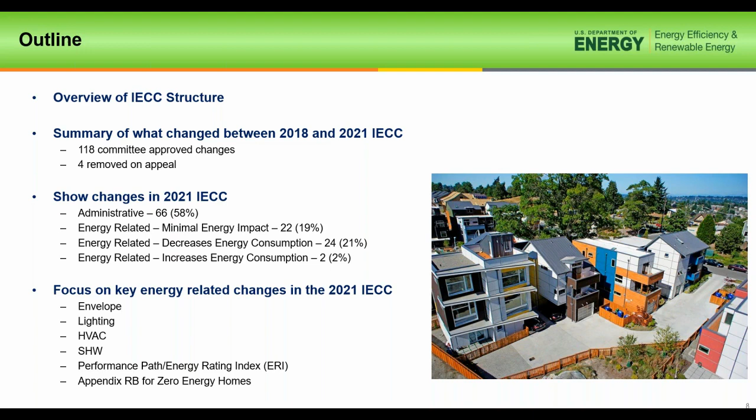So let's start with the structure of the IECC. So the first question is, why do we care about the IECC? What's important in this realm? What it does is it guarantees a minimum level of efficiency in new buildings and renovated buildings. So it ensures that we can see energy reductions, energy efficiency improvements, as well as emission reductions over the life of the building. Energy codes are a subset of the building codes, which describe the requirements for building construction.

And there's an additional cost benefit with codes: it's much more cost beneficial when we build in energy efficiency at the beginning of the cycle in the construction, as opposed to bringing in high efficiency in an existing building. It's much more costly. So if we can guarantee that the efficiency is designed and built into a new building, then it's much more effective in the building lifetime.

So we look at commercial and residential sections of the IECC, and we have similar chapters. We have a chapter for the scope and application, administration and enforcement, and definitions. We have general requirements, and then we have the efficiency chapters, and this is where a majority of our discussion will land today, which defines how to comply with the energy code and the different pathways that you could choose to show efficiency compliance.

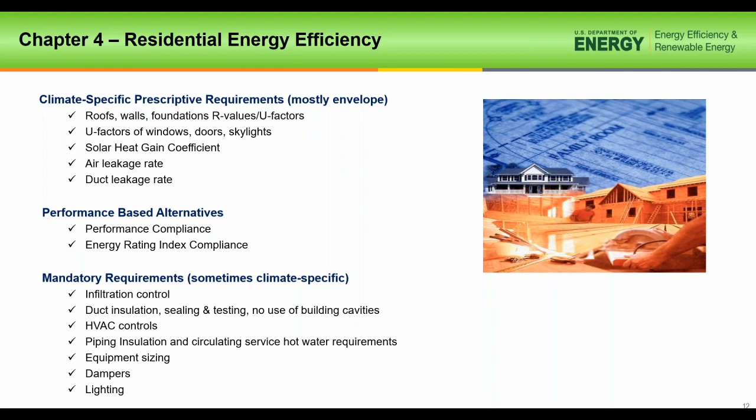And so some terminology I'll be throwing around throughout the webinar is first is prescriptive. And these are component-specific requirements that can or cannot be lessened or eliminated in trade for compensating improvements elsewhere. So I'll talk about in the next slide where there are prescriptive requirements that are absolutely mandatory to be met, and there are some that could be traded off in other places within the envelope.

The performance and ERI, the Energy Rating Index compliance paths, these take the annual performance of the home and compare it to a standard reference home. Now this standard reference home is primarily set based on the prescriptive requirements and some operational requirements in the code itself. So we're comparing a home on an annual performance between the design and the standard reference. And then again, like I said earlier, the mandatory requirements, these cannot be traded down in a compliance path. So these are absolute mandatories that must be met.

And one thing I'd like to note when we talk about performance path is, as I mentioned, the performance path is taking the design home and comparing it to the standard reference home, which is based on the prescriptive requirements of the code. The ERI path is comparing the design home to a standard home that is part of the RESNET Standard 301. That standard is based off the 2006 IECC. So your design home for the ERI is compared to more of a 2006 IECC level home to come up with the ERI rating.

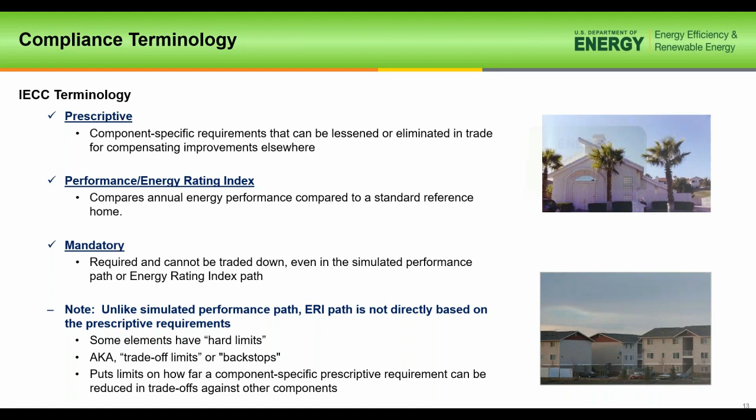So we'll talk a little bit more about the compliance pathway options. So there are actually 3 options within the prescriptive requirements that you can show compliance. One is an R value prescriptive requirement. So basically, this is saying that your R values in your envelope meet the prescriptive requirements, point blank. If they do, great. If one envelope component does not meet that R value, the building does not comply. So it's very easy to show compliance with this. You can have it in a hand checklist or a spreadsheet. You can show that the home meets the R values and the home complies.

There are U factor and UA trade-off possibilities where if you're looking at the U factors of the envelope, you could trade off assembly components within that component U factor. So in the walls, you could create any wall assembly, but as long as the U factor for that wall meets the U factor requirements, then that wall complies, but it must be all through the building. So the walls, the roof, the floors must meet the compliance U factor.

There's a UA trade-off compliance path as well. This gives a little bit more flexibility where you can trade off UA values between envelope components. So you may have a wall insulation that may not meet the prescriptive requirements, but you have a roof insulation that's well above the prescriptive requirements. So the UA for your ceiling, you can trade off some of that benefit to the walls, and as long as your design building UA is less than or equal to the UA of the standard reference home, then that building will comply.

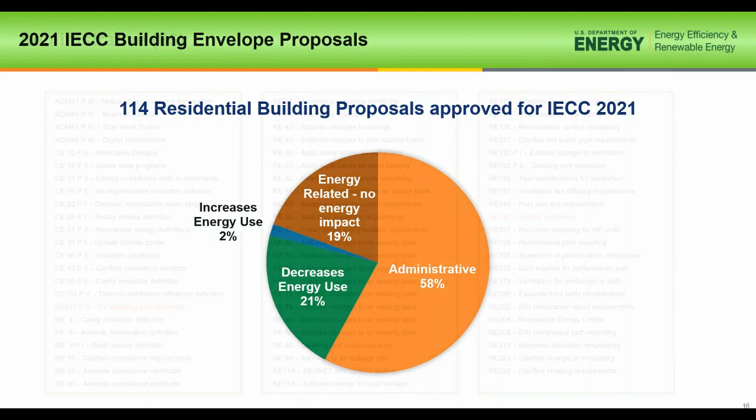So as you can see here, 66 administrative changes to the standard, a majority of them are editorial, process changes, clarifications, definitions, adjustments, and amendments. So these really don't have much of an energy impact, but are clarifications and updates to the code. You can see I've highlighted two in red over here, RE147 for electric readiness, and the one for EV charging and readiness. These two were removed on appeal by the appeals board, so those will not be part of the 2021 IECC standard.

These sets were deemed to have either minimal energy impact or possibly increased energy consumption. When you think about this minimal impact or increased energy consumption, there could be arguments that in certain cases these could possibly decrease energy consumption or maybe have more of an impact. But like I said, based on our established methodology, this is where these proposals fit into place. And we'll be discussing quite a few of these as we move forward.

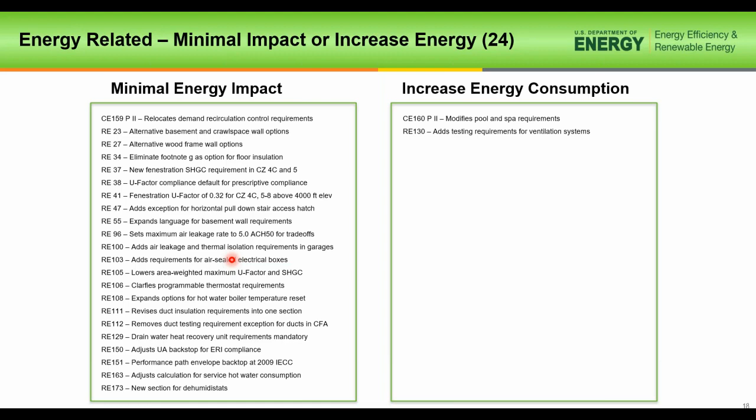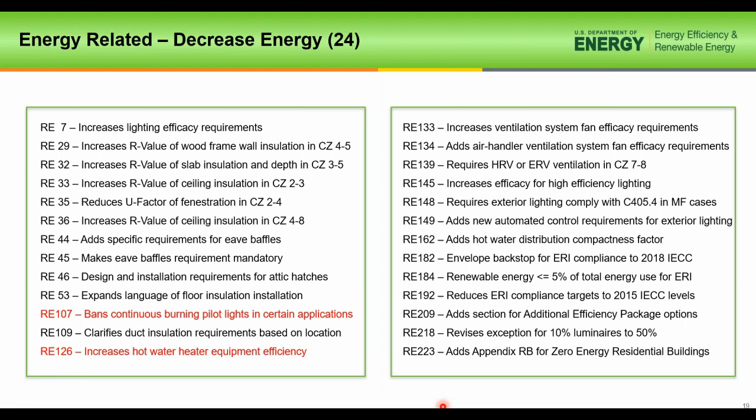And then finally, we have 24 proposals that will definitely be decreasing energy. And again, I'm showing two here. One that bans continuous burning pilot lights, and the other that increases hot water efficiency. Those were removed on appeal as well. So we ended up with 24 proposals that will be going into the 2021 IECC that will help reduce energy, basically increasing efficiency. So without further ado, let's look at the components themselves of the buildings and see what's going to be changing.

So RE29 basically says increase R-value of the wood frame insulation in climate zones 4 and 5. And so you can see here, basically adding R5 insulation to the sheathing. So as opposed to 20, there's 20 plus 5 or 13 plus 10 for climate zones 4 and 5. So this will definitely, in those climate zones, help increase energy efficiency.

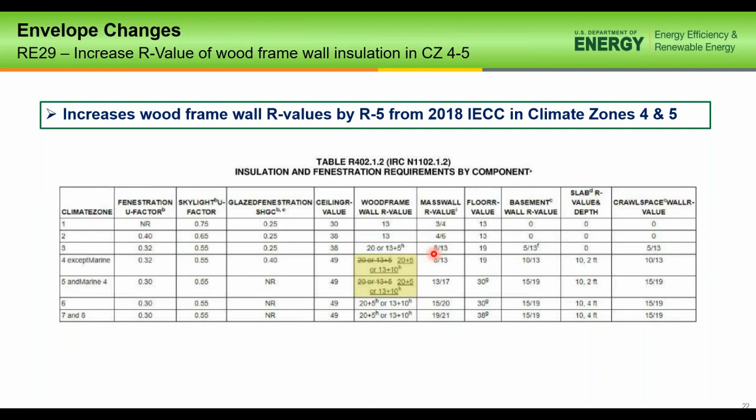And then for slabs, we got some new slab insulation requirements. One being for climate zone 3, previously there were no requirements for slab insulation in climate zone 3, and now there's R10 at 2 feet of depth for perimeter slab insulation. While in climate zones 4 and 5, they've kept the insulation the same at R10, but increased the depth from 2 feet to 4 feet, matching up what's in climate zones 6 through 8. So that will definitely help in the heating season for energy consumption. Especially in climate zone 3, it might show a little increase in cooling consumption, but overall there'll be a total energy reduction there.

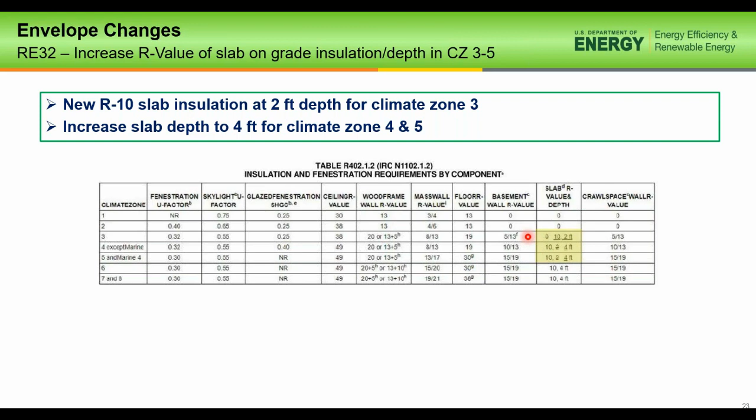So for ceilings, we've got 2 proposals affecting different climate zones. For climate zones 2 and 3, we're going from an R38 to an R49. And then in climate zones 4 through 8, we're taking it from R49 to R60. So definitely increases that will benefit energy consumption. So all climate zones except climate zone 1 will be shifting in the 2021 IECC.

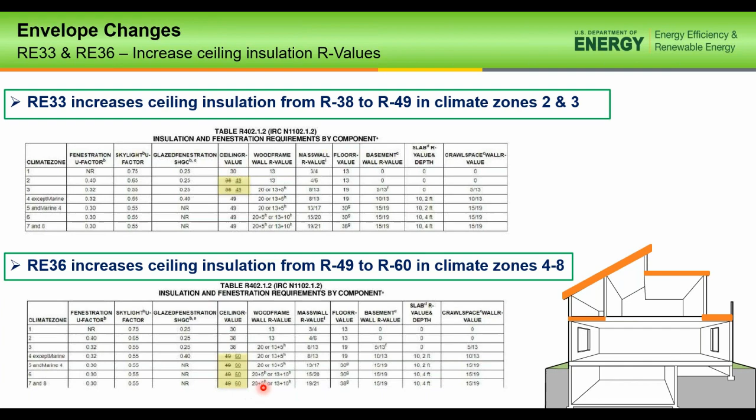So then we've got 3 proposals that affect the window requirements. As you can see, in climate zone 2, we're going from a U-factor of 0.4 to 0.35, and then in climate zones 3 and 4A and B, going from 0.32 to 0.3. So definitely improving the stringency of the window U-factors. Also, RE37 is adding a solar heat gain coefficient requirement of 0.4 for climate zone 5 and 4C.

And then there's another requirement down here which possibly has an energy impact of increasing energy consumption, where we're specifying an allowance of a U-factor of 0.32 in climate zones 4C up to 8 for homes above 4,000 feet in elevation or in windborne areas. You can have a U-factor of 0.32 rather than 0.3, because in those harsher climates, it's hard to get lower U-values, especially based on the pressure differentials or the structural protection for these windows. So those were the reasons behind this proposal of allowing a U-factor of 0.32 rather than 0.3 in these locations.

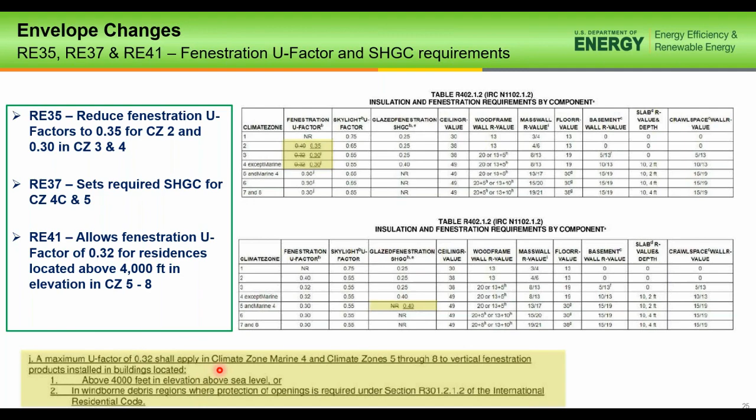And this one, this is where we're excited that we have backstops for windows in the code. This is one of the mandatory requirements, where even though you have prescriptive requirements for the windows and allowing for trade-off, you still have to meet an area-weighted maximum U-factor or solar heat gain coefficient. So in climate zones 4 and 5, it's going from 0.48 to 0.4, and from 0.4 to 0.35 in 6 through 8. And then for the windows, the solar heat gain coefficient is going from 0.5 to 0.4. So this provides a mandatory backstop for your windows.

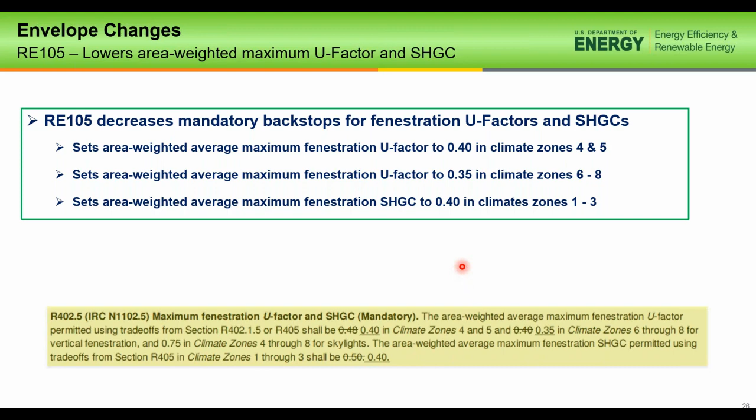And the reason behind this is, since earlier codes, this hasn't changed at all. While prescriptive U-factor and solar heat gain coefficient requirements have dropped over the years, so they've improved, this backstop has remained the same for all these years. So this change effectively better aligns the backstop to what the current prescriptive requirements are for U-factors and solar heat gain coefficients. So this one has been a long time coming.

And there were two proposals that added additional assembly possibilities for the walls and basement walls. So originally, you could use R15 continuous insulation or R19 cavity insulation, and you still can, but now we've added a possibility that you can use R13 cavity insulation combined with R5 continuous insulation. So this is in climate zones 4C through 8 for the basement walls. It doesn't really affect energy consumption, just gives different prescriptive allowances for different assemblies.

And the same with the wall requirements, where here it gave an option that you could have zero cavity insulation and provide all your insulation on the sheathing or exterior, so it's continuous insulation. So this provides just different options that you could use in the prescriptive path for showing compliance.

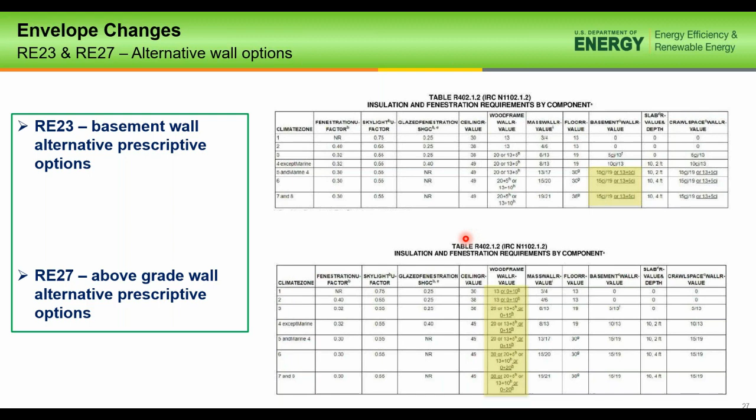Another envelope change is under the performance compliance. Now it allows infiltration to be at 5.0 ACH50, so it allows trade-offs based on your air leakage in the design home. So for the prescriptive requirements, if you're in climate zones 3 through 8, you still need to meet the 3 ACH50 infiltration requirement. But if you're going through a performance path, as long as your air leakage is less than 5 ACH50, the home will comply and meet the requirement. And it allows the design home to get trade-off credit for lower, tested infiltration.

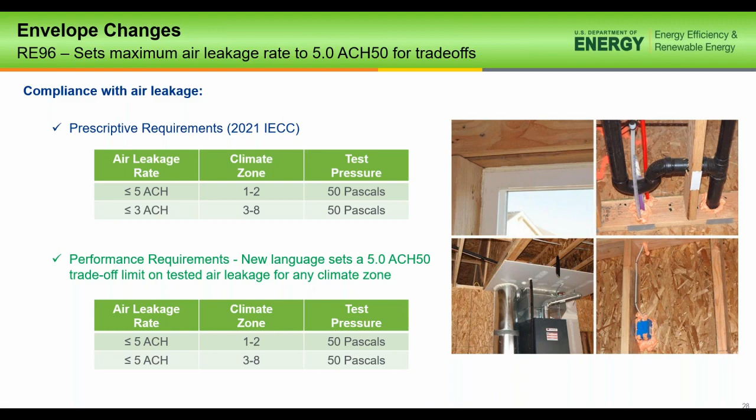So if your design home had 3 ACH50, you could use that benefit to trade off with other components in the building. So you might have a little less envelope efficiency that could be covered by the better, tighter home. So your infiltration could gain that credit. So the important piece is if you're doing prescriptive compliance, the air leakage requirements have not changed. So those were the envelope changes.

We'll go through some of the lighting changes that you'll see in the code. So there were two proposals, RE7 and RE145, that increased the efficacy in the definition of high efficacy lamps. RE7 specifies that lamps must have 65 lumens per watt and keeps the percent of lighting at 90%, maintaining that 90% of your lighting must consist of high efficacy lamps. Whereas RE145 states that the lamps shall be 70 lumens per watt and that all lighting in the home will be high efficacy lighting. So it'll be interesting when the published version of the 2021 IECC comes out, how they combine and harmonize these two proposals to come up with final language.

So to be determined. And then RE148 specifies that all exterior lighting in low-rise multifamily buildings must comply with IECC section C405.4 for exterior lighting. So this just governs the allowances for exterior lighting based on location. So it specifies areas like parking, facade, entryways, etc. So this now has allowances based on where the exterior lighting is located.

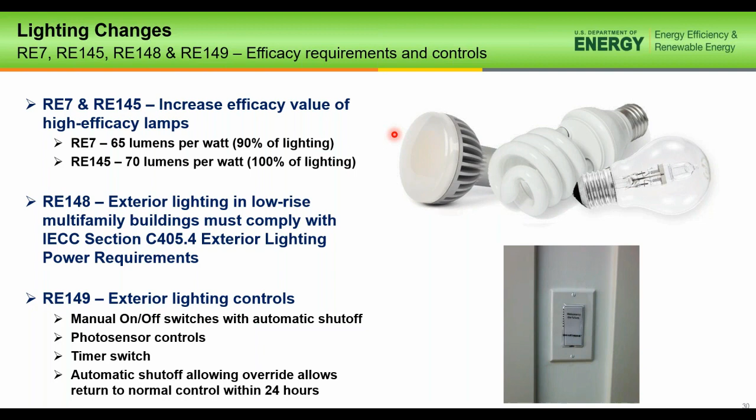And now we'll talk about some HVAC changes in the 2021. So in the past, duct leakage testing, it was always an exception. If you had ducts in the conditioned space, you did not need to duct test those ducts. That exception has been removed. So now, no matter where the ducts are located, they will need to be tested with a duct blaster.

And the reason behind this is that even though all the ducts may be inside conditioned space, and there would probably be zero to very little duct leakage outside, there could be comfort issues. If you have installed very leaky ducts inside the space, the spaces on the far end of the duct run will not be getting the required airflow. So the argument here is that this will reduce callbacks and improve comfort and balancing within the building itself. So it's a performance and comfort issue.

Probably will not have any energy impact or minimal energy impact, but this will probably affect builders and those who do the duct testing, that where they usually had the exception, now they're going to be testing those ducts. So I think it's a good thing that this is in place.

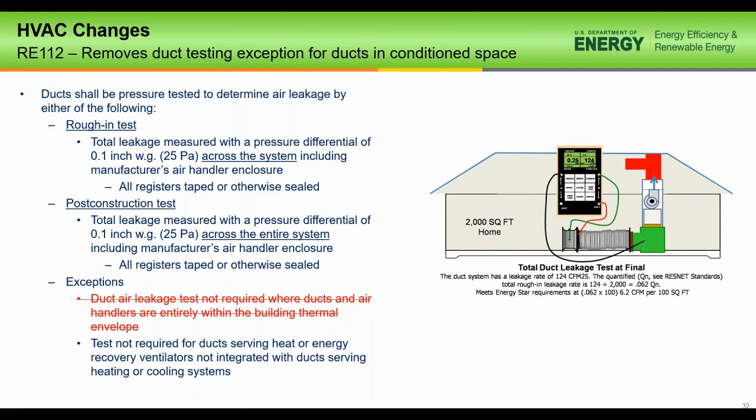Then we got some mechanical ventilation requirements. RE 130 now mandates in the code that mechanical ventilation systems shall now be tested and verified that they provide the minimum flow rates based on the building itself. So there will be some kind of a verification that the mechanical ventilation systems are meeting those minimum flows.

We also have some increases to the efficacy based on the type of fan. So inline fan went from 2.8 to 3.8 CFM per watt. Bathroom fans, based on the flow rate, went from 1.4 to 2.8 CFM per watt. And then if it's 90 or above, it went from 2.8 to 3.5 CFM per watt. So increasing definitely helps reduce some energy consumption there for ventilation fans. And then also there was a newly added section for integrated air handlers as part of air cycler systems, that these must meet 1.2 CFM per watt.

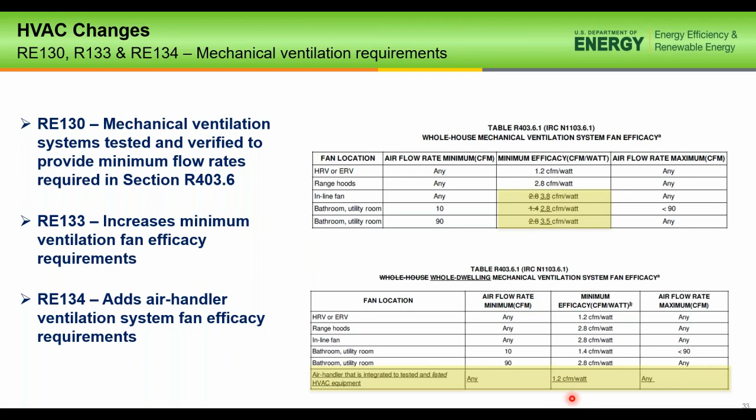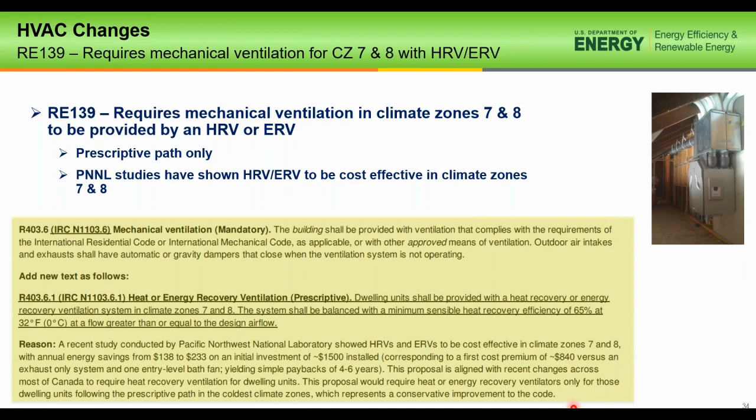So RE 139, now for prescriptive path only, is going to require the mechanical ventilation in climate zone 7 and 8 to be provided by an HRV, a heat recovery ventilator, or an ERV, an energy recovery ventilator. There was a study done at PNNL that showed that these units can be cost effective in climate zone 7 and 8. So that was the reasoning behind this proposal, and it was accepted. So for those two climate zones, having an ERV or HRV over a standard supply only or exhaust only will definitely help reduce energy consumption for the ventilation piece. So those were the HVAC changes.

Now we'll look at the service hot water changes that'll be going into 2021 IECC. So RE 162, this proposal adds a compactness factor to the performance path for hot water usage. So in the past, basically the only way to show energy savings in the service hot water was to have a high efficiency hot water heater. And there was no way to incorporate compactness of design, or how centralized your water heater was in relation to the fixtures in the home. So now this incorporates benefiting compact design in the home for a compact water distribution system, as well as having a centralized hot water heater.

So the original equation for determining the hot water demand on a daily basis was the standard, 10 times the number of bedrooms plus 30, and that would be your gallons per day for the home. So in the proposed design, we're going to adjust that equation by incorporating the compactness factor. So here it shows various levels of the compactness of the distribution system. The higher the compactness, obviously there's no benefit, but as you become more and more compact in your design, this factor will come into play and reduce the gallons per day in your design home, so you can show savings of this in the performance path.

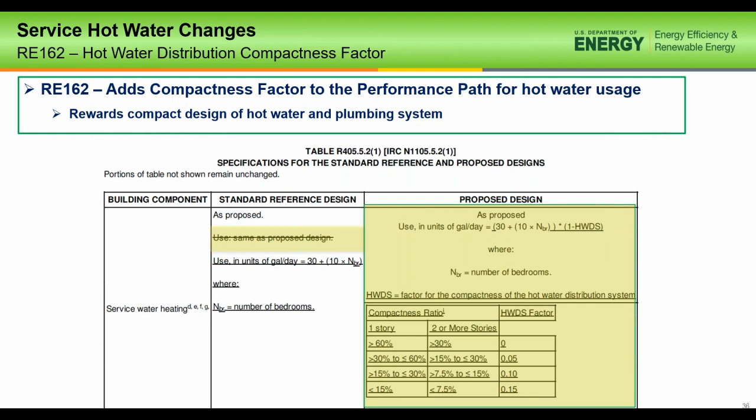So here's how you specify the compactness factor. First thing is you locate the water heater, and that's signified by this red dot. And then you draw a rectangle through the center line of the water heater and the plumbing fixtures along the wall. So in this case, since we've got a fixture along this point of the wall and in the kitchen along this wall, the square is going to come outside that water heater. So that's the reason it's not through the center line of this water heater. But this is the area of your hot water distribution system.

So we calculate the area of this rectangle, and we know the conditioned floor area, so you're going to divide this compact area by the total area, and that's going to give you your compactness factor. And then you can see if that is low enough to take advantage, so you can calculate that your proposed design will have a lower hot water consumption in gallons per day.

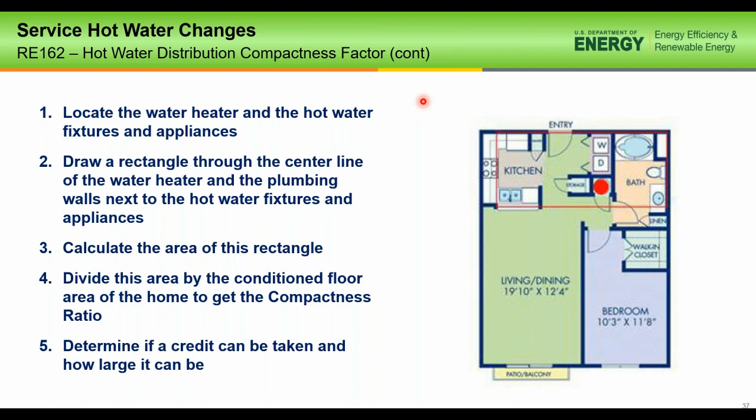So I can show you what this could look like, how this could benefit. So let's take the case where we have, and I apologize if these aren't super clear, but you'll get the idea, a home where the water heater is at one corner of the garage, and we draw the square that encapsulates all the hot water distribution system. So in this case, we have 1,147 square feet of floor area in this home, and our hot water system rectangle is 828 square feet.

So dividing that 828 by 1,147, we get a 72% compactness factor, which we don't get any credit for. It's just too high of a compactness, so it's not going to get credit. Now, if we just move that water heater to the other corner of the garage where it's closer and makes it more compact and centralized, now we have the same square footage in the conditioned floor space, but now we have 575 square feet in this smaller rectangle.

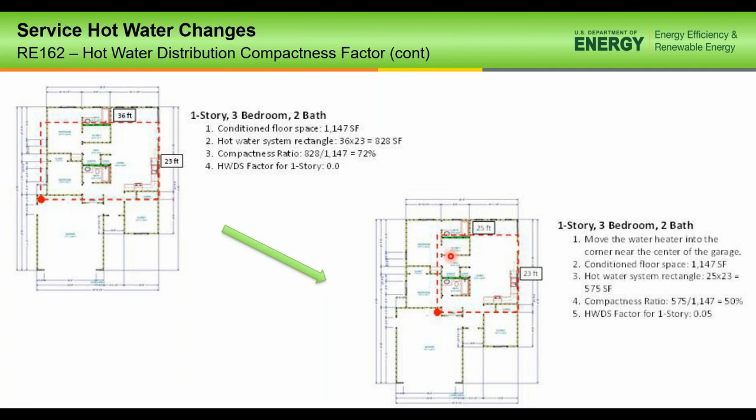So now our compactness ratio is 50%, and we get a 5% reduction in our hot water usage. So we can take credit for that in the performance path. So this proposal will really help incentivize compactness of the whole hot water distribution system.

So another proposal that's similar in scope and in effect on hot water consumption is adjusting the equation for hot water gallons per day. In the past, like I said, it was 10 times the number of bedrooms plus 30. Now it's 25.5 plus 8.5 times the number of bedrooms. So this is probably about a 15% reduction in hot water gallons per day for the proposed home. And it is the same in the reference design.

So while this shift will reduce the consumption for hot water, it's going to be the same for the standard design as well, so there's no real benefit. You're not going to get credit for this because the reference design has the same hot water demand, but it does shift down the overall energy consumption for both designs. It brings that a little closer to actual hot water schedules in homes.

And this equation has not been updated since 1996. Sorry, 1998. So it's good that this is becoming more realistic with what homes are seeing as far as hot water consumption.

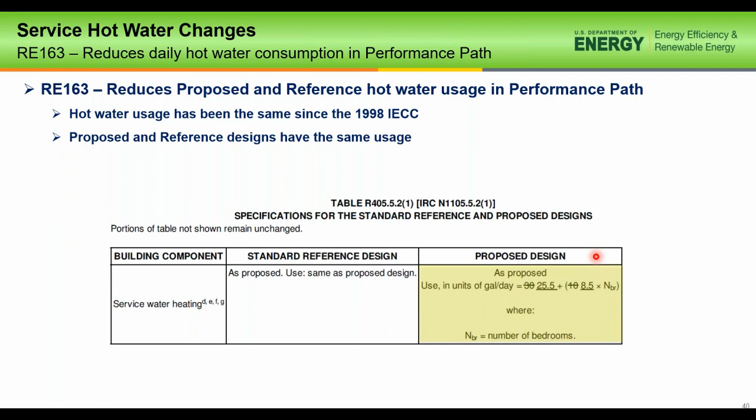So the result of this was that 10% of the counties in the U.S. had different climate zones. So with the IECC adopting 169-2013, we're going to be using this climate zone map for the performance approach in the annual performance analyses.

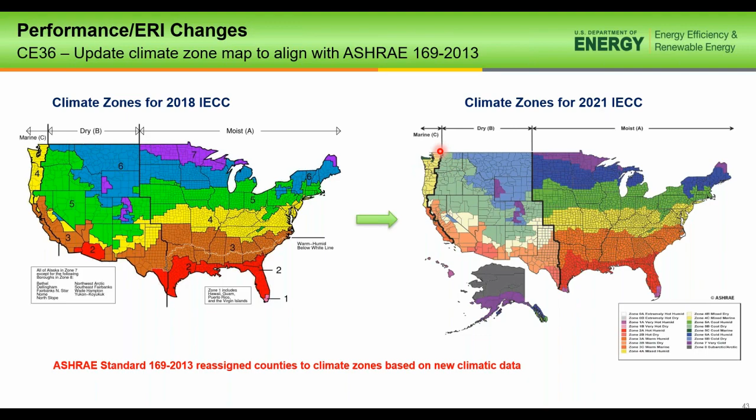So what this shift essentially does is a lot of counties in the country will be shifting to a milder climate zone, so they'll have less stringent prescriptive requirements. As you can see, the greens represent counties moving to colder climate zones, and the reds are counties moving to warmer. So the green counties will have more stringent prescriptive requirements, while the red counties will have less stringent prescriptive requirements.

So this will play into the overall, national-level impact of the 2021 IECC.

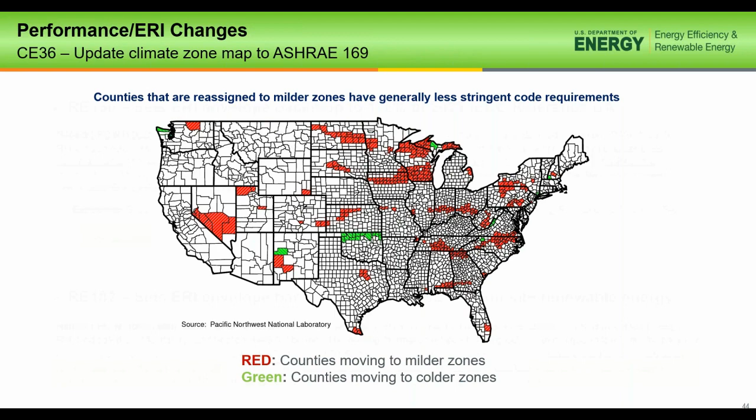On the ERI side, there's 2 proposed backstops. The first one, RE 150, is setting the ERI envelope backstop to 115% of the 2021 IECC reference UA. So earlier on, we talked about for a UA prescriptive approach that the UA of the proposed design must equal the UA of the prescriptive design, and then it complies. Well, in this case, just as a backstop for the ERI, we're allowing the 15% boost on the prescriptive reference design. So this is just a backstop in the ERI compliance path, making sure that the envelope is within 15% of the prescriptive reference design UA.

And there's also a secondary one from RE 182 that sets the backstop to the 2018 IECC when using on-site renewable energy. So if your design home has on-site renewable energy, the backstop for the envelope is basically saying the UA of your proposed design must equal the UA of the 2018 IECC prescriptive design. So again, there's a lot of overlap on these. It'll be interesting to see how the final version of the 2021 IECC melds these 2 together to come up with either a dueling or a single envelope backstop for the ERI.

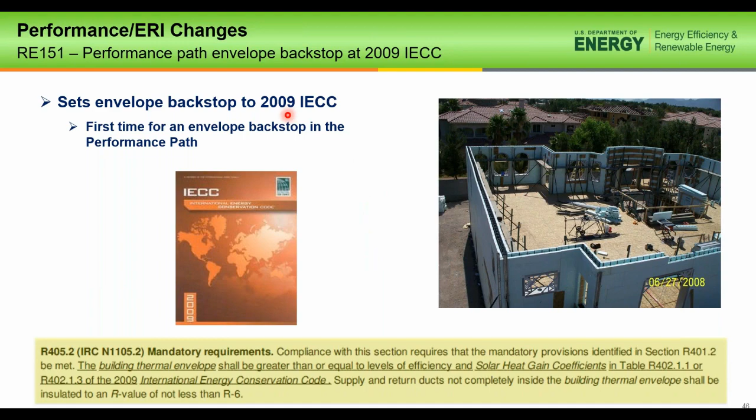So typically in your performance software, you're going to do a UA check, making sure the UA of the proposed design meets the UA of the 2009 IECC. That's the simplest way to show that kind of compliance. So now the envelope must meet that level of stringency of the 2009 IECC.

In the performance path now, there's a section in table R405 that specifies humidistats. So starting to think about latent loads and latent load recovery. So this is setting humidistat requirements for the reference design, and also in the proposed design, these are the very same requirements that it must meet. So similar to what I mentioned earlier with the hot water, where the hot water demand was changed in both the proposed design and reference design, you're going to have similar settings for the humidistats in the proposed and reference design.

So now the whole annual energy consumption will be accounting for the latent loads in the house. So I think right now this will help encourage compliance software providers to account for the moisture in the home. So I think we'll see future advancement of this in future energy code cycles.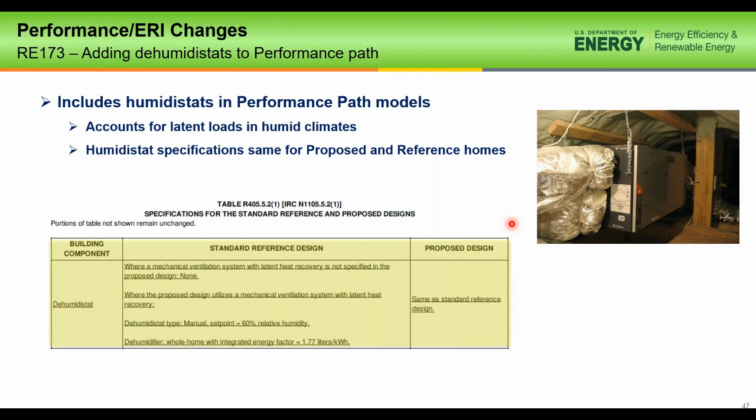And another change that accounts for the ERI is that there's now going to be a cap on how much renewable energy can be used in the ERI calculation. In past cycles, you could have a substandard home that may not meet the simulated performance requirements, but then we could just throw on a huge PV system, and that home would then comply in the ERI pathway.

So this sets now kind of a cap on renewable energy to 5% of total energy use. So this helps ensure that there's a good envelope and HVAC and air leakage design in the home, and not relying completely on renewable energy to lower the ERI. So this places a limit on how much credit on-site renewable energy can provide.

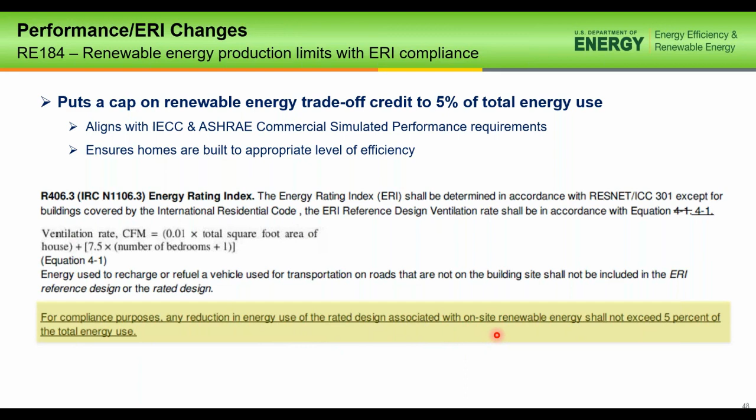And so in the 2021 IECC, the ERI targets are going to be set back to the 2015 ERI targets. So if you look at the 2015 levels, these are 52, 54, 55, 53. So we're setting the 2021s back equal to those values. The 57, these numbers were what was in the 2018 IECC. So the scores were increased because of the changes in the code that reduced the ventilation requirements in the ERI reference home, and the result of that was that they increased the ERI scores significantly.

It could be 5 to 10 points in some cases, and so it made it harder to get down to the level of the 2015 ERI targets. So now that the 2021 IECC is going to be set back to those targets, it'll be harder to meet those targets with the ventilation requirements of the reference home intact. So it'll be interesting to see how many homes can meet those 2021 ERI targets.

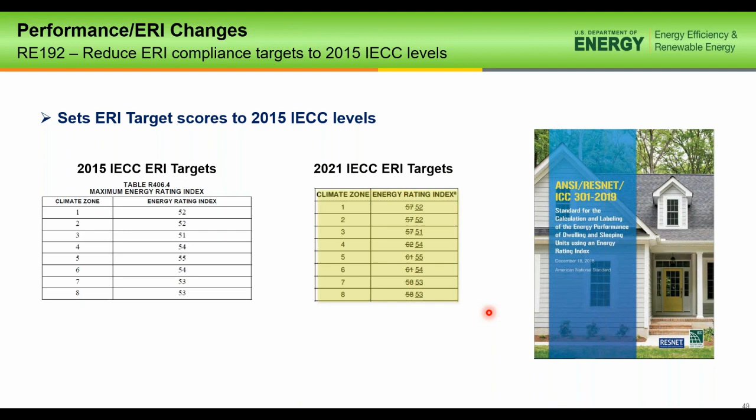And so another big proposal that's going to help increase energy efficiency is RE209, which is adding in additional efficiency option packages. So this is similar to the commercial IECC portions of the code, where there are options that are required to be chosen that would increase efficiency of the building. So in this case, there are 5 options that the primary goal is to increase efficiency of 5% beyond the

prescriptive requirements. So option 1 is an enhanced envelope performance option, where basically the design UA now has to not only just meet the standard UA, but has to be 5% below the standard UA. So 0.95 times the standard UA is the requirement. Option 2 is efficient HVAC equipment performance, where you have a furnace of 95% AFUE or better and a 16 SEER air conditioner or better,

or an air source heat pump with a 10 HSPF and 16 SEER, or a ground source heat pump of greater than 3.5 COP. So option 3 could be a reduced energy in your service hot water. So you're having higher efficiency water heaters, 0.82 EF for oil or gas water heaters. Electric must be 2.0 EF or greater, which is probably a heat pump water heater level, or a solar water heater with greater than 0.4 solar fraction.

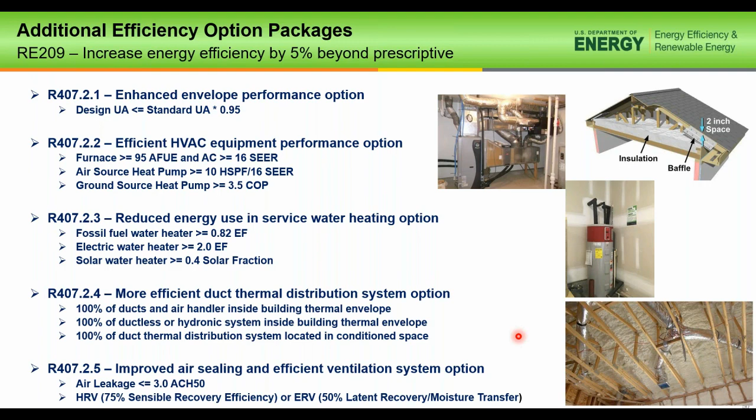So picking any one of these 5 is mandatory. It is not something that can be traded off, but you need to prove that your home has one of these 5 options. And then finally, Appendix RB for a zero energy home. This basically allows jurisdictions to adopt a model and a standard for zero energy home designation. So this is not a requirement unless a jurisdiction adopts and makes this appendix part of their code, then this would be a requirement. So basically it shows the pathway to prove that this is a zero energy home where you have 2 ERI scores based on your climate zone.

So you'll have an ERI without on-site renewable energy. So this is basically reflecting that you must, based on these levels in the 40s, have a very efficient design in your home. The envelope, the mechanical systems, they're airtight, efficient lights and appliances, and you first meet these scores, and then you supplement that with enough PV that your final ERI is a 0. In that case, then you have truly a zero energy building based on these requirements. So if a jurisdiction does not specifically mandate or accept this part of the code, then it is not required.

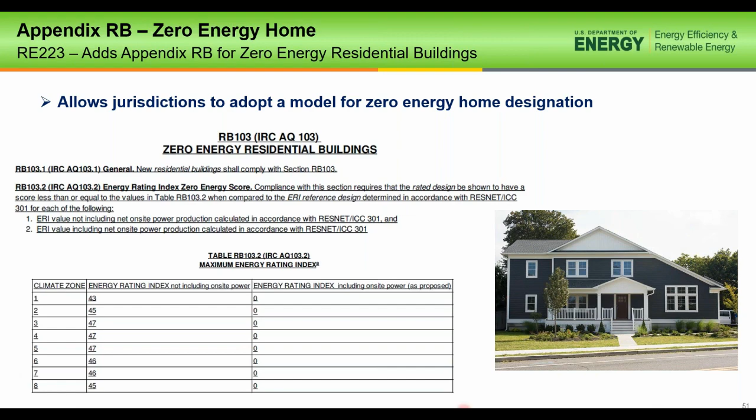So those were all the changes that we felt have the most impact on energy consumption. As you can see, if you look at this map here, the percentage of state populations that are going to be moving to warmer zones based on the climate zone changes, you can see North Dakota, Texas, North Carolina, Wisconsin, these are the ones that are going to be seeing the most shifts based on population areas and population density where these climate zone shifts occurred. So it will be interesting to see a final result when we do our final determination study to see what is the overall impact of the 2021 IECC.

And we have plans to implement the 2021 IECC into our REScheck and COMcheck software next year, in the spring for REScheck and in the fall for the COMcheck software. So keep an eye out for those. And with that, I will take any questions that you have.